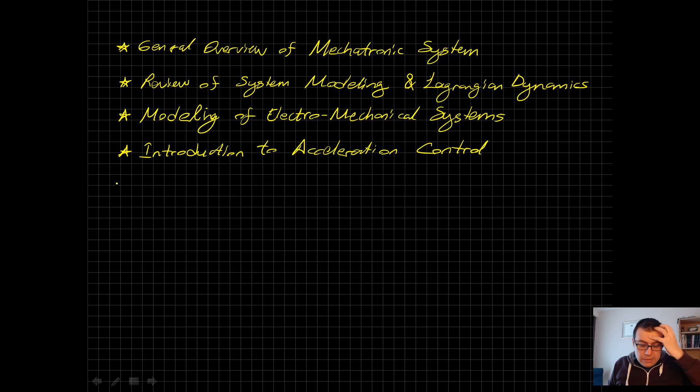So we introduced introduction to acceleration control. And from the acceleration control, we came to the point that if we have certain tools, our systems will be able to trace the desired accelerations, the demanded accelerations from the system.

And there we introduced the disturbance observers. Sorry for those errors. Sometimes my pen is giving some errors. I don't know why. Well, we learned the concept of disturbance rejection, which was one of the main items to be dealt with for robust motion control for high precision systems.

And if you remember, while going over the acceleration control chapter, I was putting there a magical box where I was giving the inverse dynamics of all of the disturbances, assuming that they are known. And here, in this week, in the disturbance observers chapter, we have learned that not all of the disturbances could easily be modeled, but sometimes they had to be estimated, and the disturbance observer concept, actually we were abbreviating it as DOB, was there to estimate or, let me say, measure the disturbance of the system.

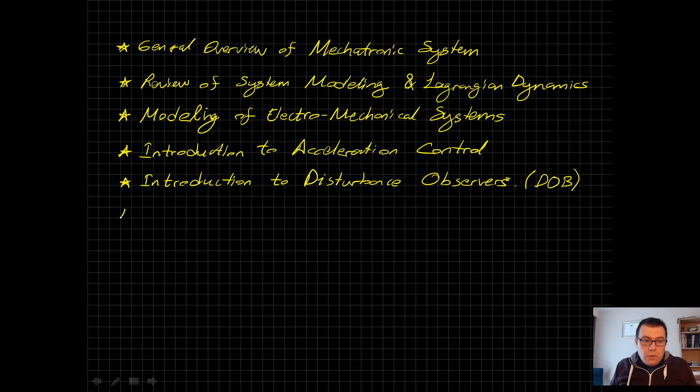So in the following week, we moved to the control of force, and we have introduced, once again, these errors, sorry, introduction to force observers, let me say. Well, I think we can change this notation, and the observer we are talking about is the reaction force observer.

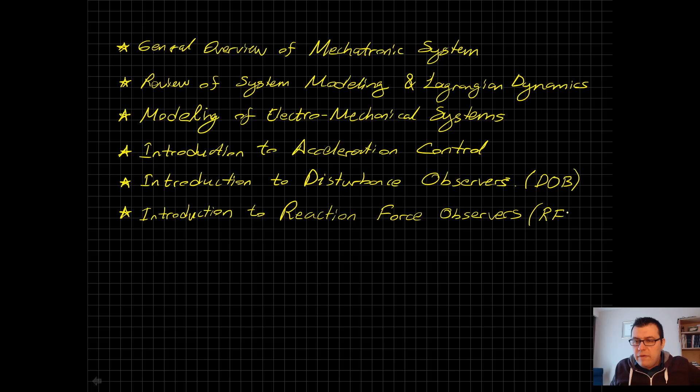Reaction force observers. Well, that was called RFOB. Now, if I segment the course into several episodes, I can easily claim that the first part, this part, is basically a review about the fundamental concepts and why we need motion control. This part is an introduction to the basic tools that we will be making use of throughout our derivations for a variety of motion control applications.

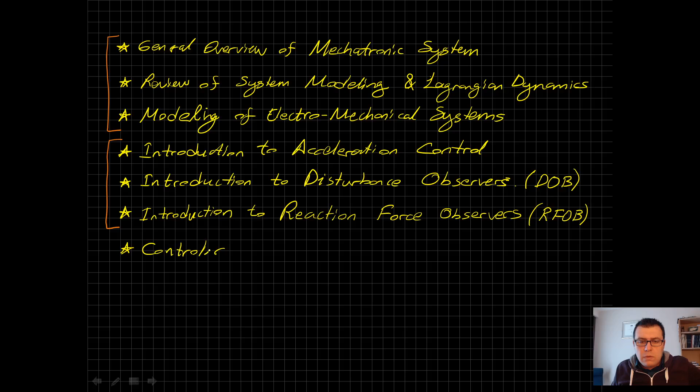And once we have done with the derivations or the formulations of these items, then we started the control action. I'm calling this the controller design for single degree of freedom systems. And if you remember, under this title, we have gone through several different controllers. Let me mark them one by one. We had 4 main controller types for the single degree of freedom systems.

The first one of the controllers that we have covered so far was the velocity controller, right? So velocity controller. We have started with this because this was the easiest to formulate. We just needed the first order differentiation to obtain the desired acceleration for the acceleration control. And from the velocity controller, we moved to position controller, where we have covered the framework which required second order differentiation.

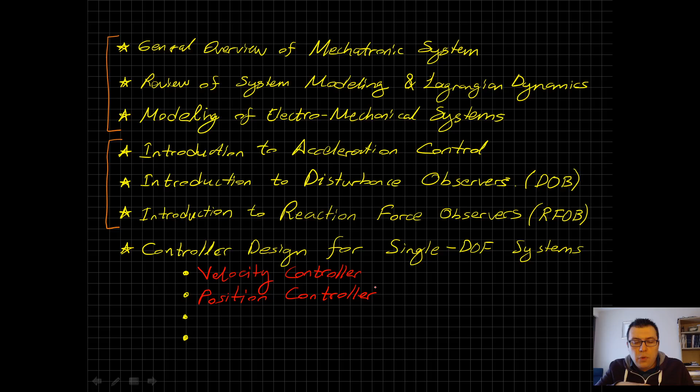The fundamental reason for this was the position signal itself is the zeroth order signal, and in order to reach the acceleration dimension, you need to have 2 times derivative. So you need twice differentiation, and the formulation of errors for velocity control and position control were different from one another. And then we said that sometimes we can combine velocity control and position control together to reach to something that's what we call as generalized error control. Let me also take a note of this. Generalized error control. In generalized error control, we were specifying our error as a linear combination of velocity and position.

And then we were finished with the controller part related to the velocity and position, and we started, actually that's what we have done last week, we moved towards the force controller, and there we have gone through 3 main methods to be covered. The first one is pure spring environment. The second one is spring plus damper environment. And the third one is force control with velocity feedback.

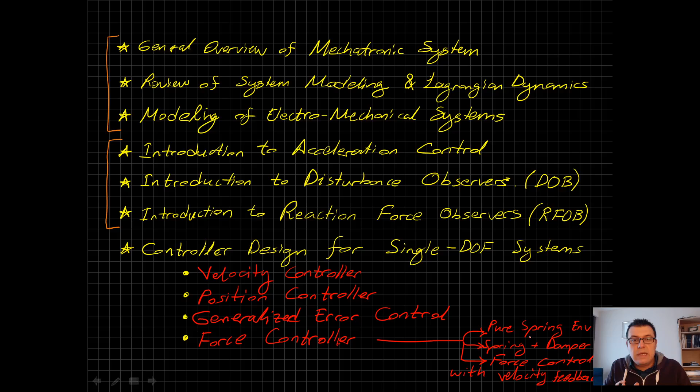So, if you remember that spring damper environment's result was actually a different expression of the force control with velocity feedback, and the difference between those two was that if you have a force controller with velocity feedback, your system first approaches to the target in a velocity controlled manner, so it prevents the impulse over the target. It gently touches the target, and then once the reaction force comes into picture, once reaction force exists, you start to control the reaction force. These were the items that we were discussing in the previous few weeks.

Now let me also take them as another episode of the class. So I can call this the first section, the second section, and the third section. Well, first section is once more about the introduction, about the main concepts. The second section is introducing the tools that will be used throughout the course for all of the derivations. And the third section was dedicated to single degree of freedom control systems design. Well, of course, not all of the systems are single degree of freedom. Let me move to my next slide.

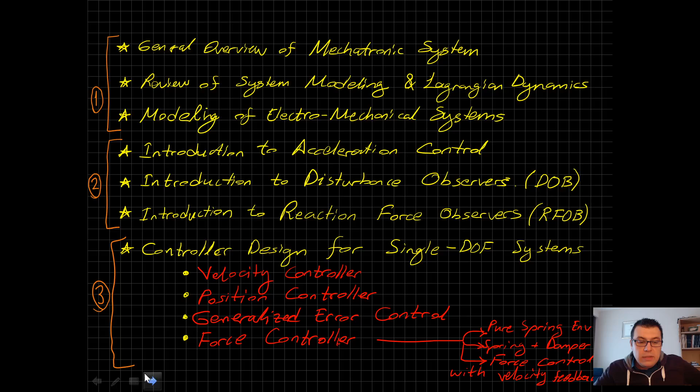Sometimes, actually in most of the applications, we're facing with systems that include multiple single degree of freedom components. We call them multi-degree of freedom systems. So, let me call this new chapter. Well, in the new chapter, we are going to be dealing with systems containing multiple single degree of freedom components. Or in other words, sometimes we refer to this as the multi-DOF systems.

Well, if we have to talk about this multi-DOF systems concept a little bit, I can tell you that it has several distinguishing features that could be treated with care. First, a multi-DOF system is consisted of several single degree of freedom systems, which means that at the joint level, you can control every subsystem with an independent controller, and that's what we will be calling later on in the robotics class the independent joint control scheme.

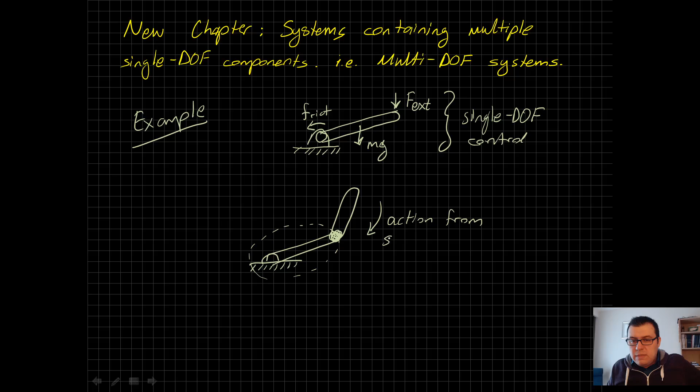Well, if you're trying to control this system, then you have to take into account the dynamics. So action from system 2 on system 1. Well, it's easy to argue that the action from the second system on the first system is nothing but a different type of disturbance, and the disturbance observer in the first system will be able to compensate that. That's true, but in order to create a complete picture for the general control of multi-degree of freedom systems, we have to carry out certain different analysis.

So, if I wrap up my words, if we are interested in controlling multi-degree of freedom systems, our control in the context of motion control systems class will be again in the joint level. So we will be covering the independent joint control structure here, but we will take into account the overall dynamics from the multi-degrees of freedom systems, multi-DOF systems. So this was kind of a summary example about the change between single degree of freedom and multiple degree of freedom systems.

Now let me move to my next slide. And let me change color back to yellow. Well, today's topic will be controller design for systems with functional relationships. So let me write here, controller design for systems. I can actually write here with multiple degrees of freedoms. Oops, that's not DOF. DOB is disturbance observer. DOF is degrees of freedom. So controller design for systems with functional relationships. And we will go through case study 1, which is grasping force control.

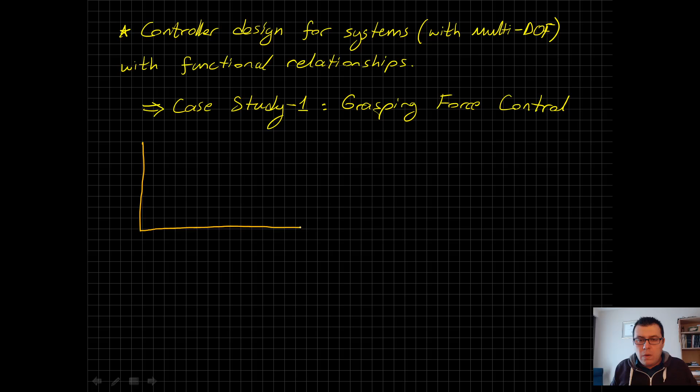Now, in our example, let me change the color for the derivation. In our example, we will go through a well-defined system. Let us assume that we have a system where we have an object to be manipulated by two actuators. Don't forget that the simplest multi-degree of freedom systems start with 2 DOF because, you know, the smallest number bigger than 1 is 2.

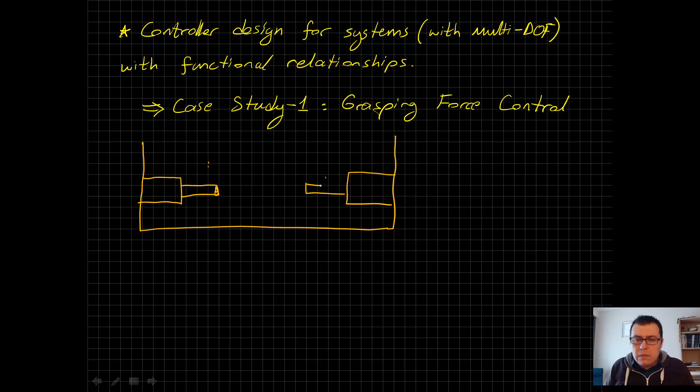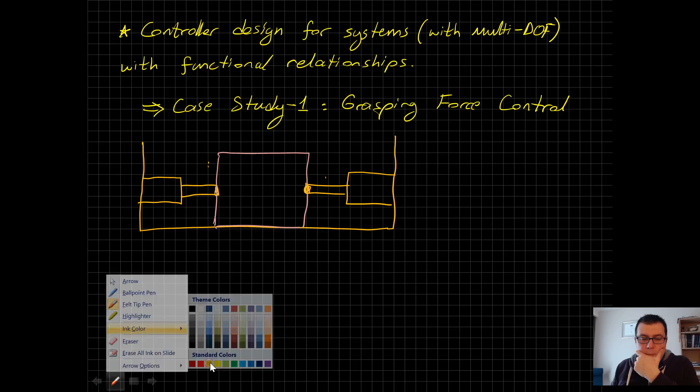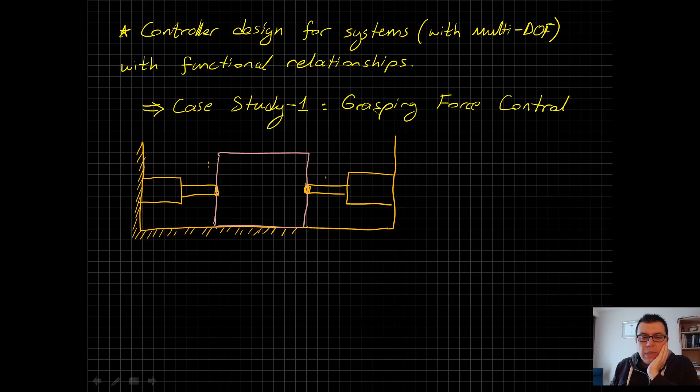Well, here we have an object. Let me try to draw you the object. Well, I think using a different color for the object would be a better idea. So this is our first actuator here. Let me draw a second actuator somewhere here. Well, I think no. I think somewhere here it might be better. So we have two linear actuators, and in between those actuators we have an object. Let me show you the object. This is our object. So we're assuming that an object is positioned between two actuators and is to be manipulated by those two actuators. So we're calling this as grasping control.

Why is it so important? So we have so many tasks where robots are dealing with grasping. So pick and place operations are one of the most common examples of the tasks that the robots have to carry out in the industry, in personalized applications and so on and so forth. Furthermore, if we are talking about collaborative robotics, now the robots nowadays are being used as devices to assist the manpower. If we are talking about collaborative robotics, we will also have grasping control duties in many applications, I can say.

That is simply something like that. You have an object to grasp. So one of the actuators is coming from one side and the other actuator is coming from the other side. So in order to hold the object, you have to preserve certain force on the object. And once you preserve the force, once you track your force control objective, your second objective comes.

You want to move this to somewhere. That's called grasp and move. And now it's time to make the formulation for this. Let me also make my axis definition here with a different color, maybe green.

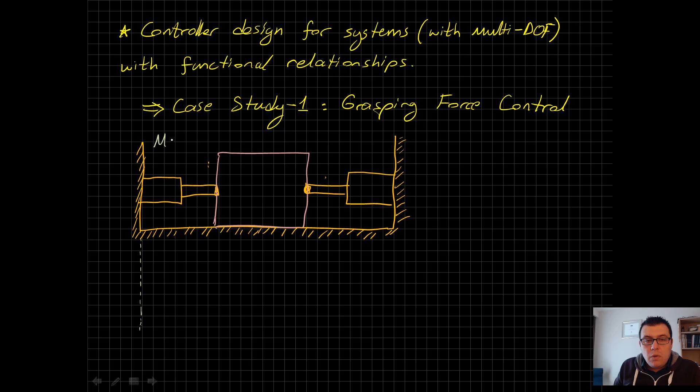So assuming that this is the point from where we make our measures, this system can easily be called the master system. For simplicity, you can call this system the slave system. These are just hypothetical names. You can call these systems system 1, system 2, or whatever. Master slave is just for ease of notation.

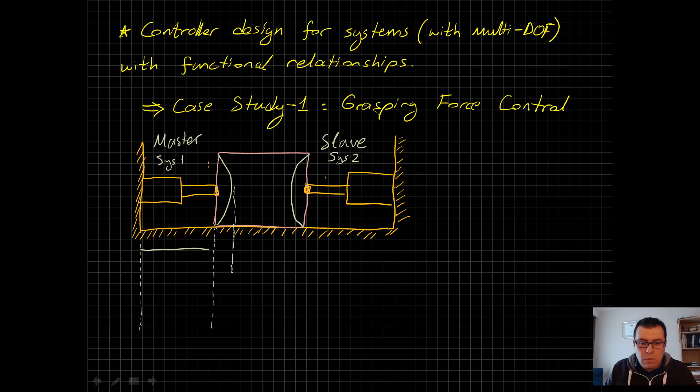If we call the coordinates, we have to define several ones. So this is 1. I'll tell you that there is one here and another one here. So this part will be, and this part will be other 2 points to be denoted. And here is actually our last point. So I will call this xm.

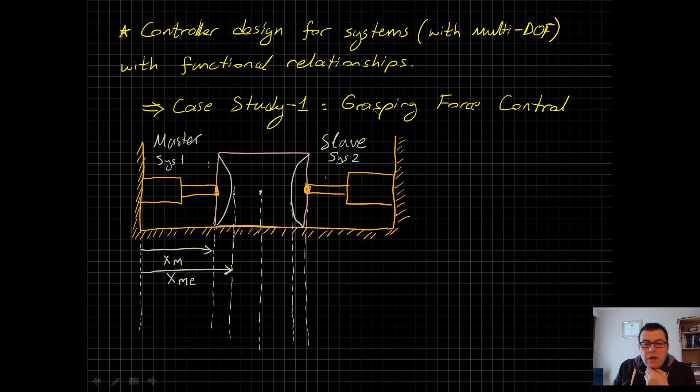So assuming that this is my reference point, this is the distance from the reference point to the contact point of the master system. And I can call the next point xme. This is the environment position. So that's actually, hypothetically, after you push your actuator and squeeze your system. Okay? These are, by the way, exaggerated.

If you don't have a material like a sponge, or in other words, if you have something with high stiffness, these exaggerated differences will not be easily observable. So you'll have micron level deflections in the system. But in order to make the derivation, I have to exaggerate them. Now, let me further define 2 more axes here. That one and that one.

So similar to this one, I'll call this XSE, the environment position of the slave system. I'll simply call this XS. This is the slave system's end effector position. And this one I'll name as X center of gravity.

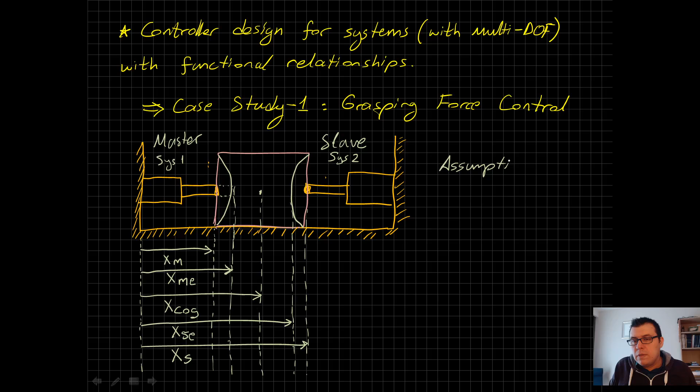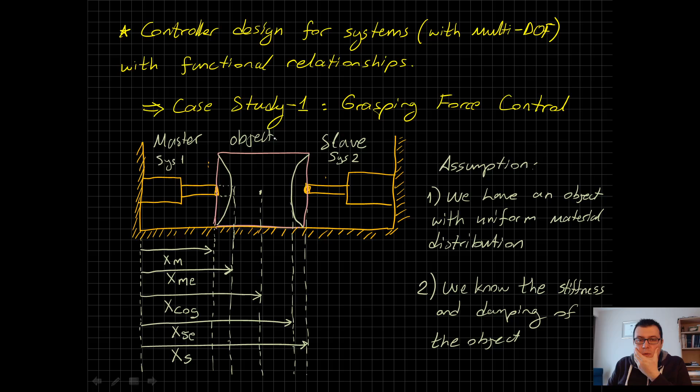So we're assuming that we have an object with uniform material density. Let me call it material distribution in general. And second, we know the stiffness and damping of the object. So this is our object to be grasped. I think so far so good.

So let's move to our next slide and start defining some dimensions. If you go back, in that slide set, the master system is holding on one side, the slave system is holding on the other side. Their collaborative action will create a force on the system to hold it so that it doesn't fall. And while preserving your force reference, you're trying to move this object. So we will try to modify the center of gravity while preserving the grasping force. In order to do this, we have to define the grasping force.

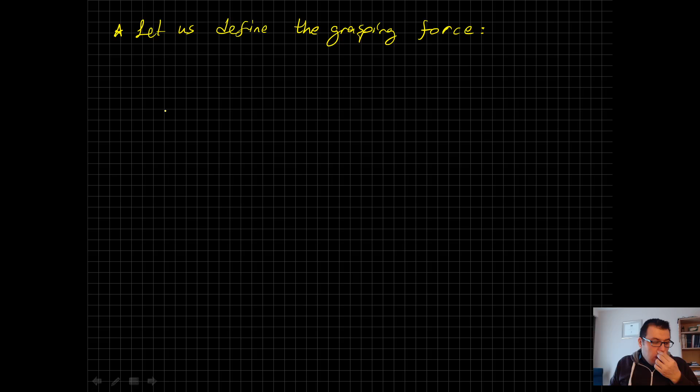Let us define the grasping force in the system. For the grasping force, we may have a look at the figure here, and we can assume an environment with certain stiffness and damping. If we recall from the previous lecture set, the stiffness times the deflection plus the damping times the derivative of the deflection gives us the force generated in the system, and those stiffness and damping are environment related parameters, the portions of the environmental impedance in the system.

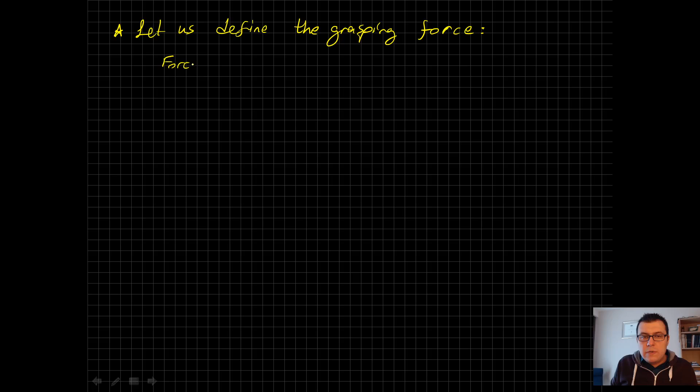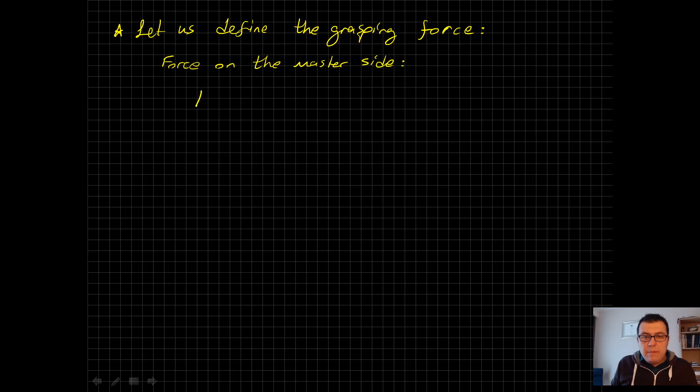So with this notion in mind, we can define the force on the master side as follows. Fm is equal to the stiffness constant, the spring constant, times xm minus xme, plus, I'm sorry, that's not the master system, that's the environment. We have one object, and it has specific Ke and De. So the force on the master side is equal to Ke times the master side deflection plus De times the derivative of the master side deflection, Xm minus Xme, dot.

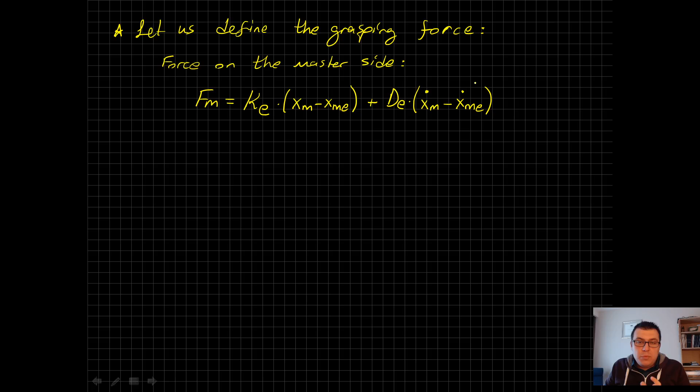You may ask me, last week we were ignoring this component. Xme dot was assumed to be 0. That was because our environment was assumed to be stationary. But now the environment will also be moving. Recall that our objective is to grasp this object and move it in the right-left direction. So this can be a good model for the force generated on the master side. Let me write in a similar manner the force generated on the slave side. Force on the slave side.

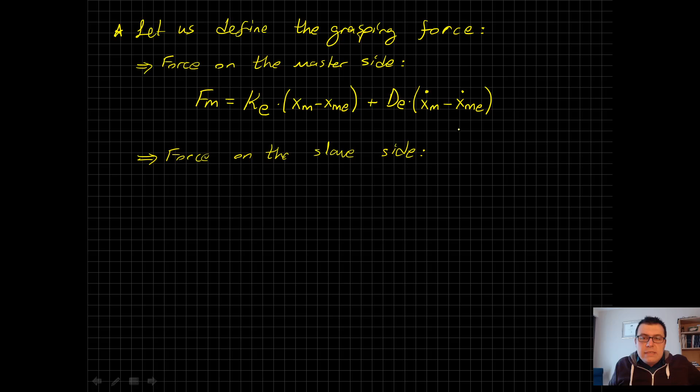It's nothing different. It's actually very similar. F slave is equal to, now we have a change of sign, minus Ke times x slave minus x slave environment, I'm sorry, this is again minus De times x slave dot minus x slave environment dot.

Well, the minus sign is obvious for most of you, but I have to express this once more. It's basically due to change of direction. If you look at the first expression, it's Ke times Xm minus Xme plus De times Xm dot minus Xme dot. So it's nothing but stiffness times the deflection plus damping times the deflection's derivative. That's the force on the master side.

In a similar manner, stiffness times the deflection and the damping times the deflection's derivative should be the force on the slave side. But look at this. Slave side force will be towards right, right? That's why we have a minus sign here. It's because of the change of direction. Okay? So, having defined this, can we formulate a term for grasp force? Can we formulate the grasping force?

Let us formulate the grasping force. The grasping force can simply be given as F grasp is equal to summation of the master side force plus slave side force. So this is a fundamental term that we shouldn't forget.

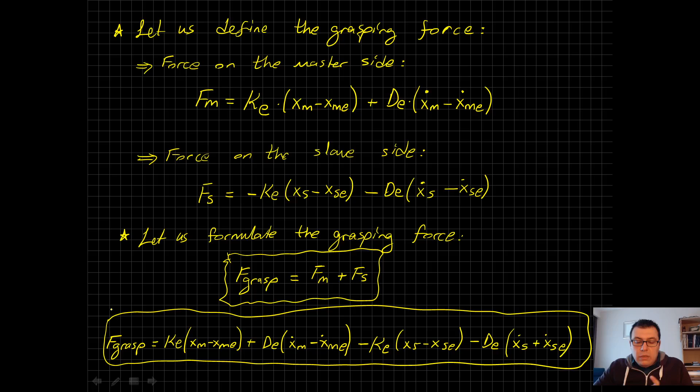So remember, these were all defined in the previous slide. This is the grasping force we have in hand. Let me also mark this equation for you, because we will make use of those definitions for our controller derivation. Let's move to next slide. So, can we simplify that? We will actually. So, let's write here. Make a trick.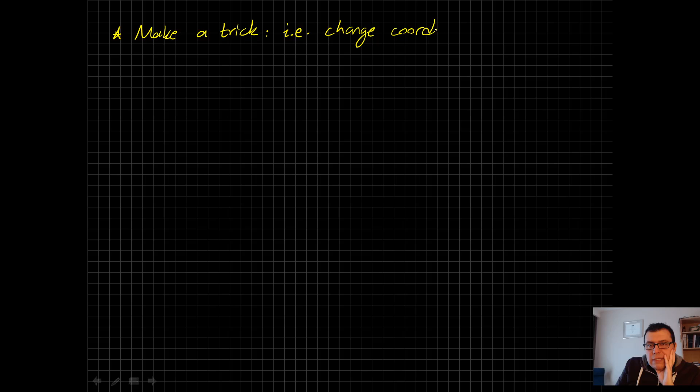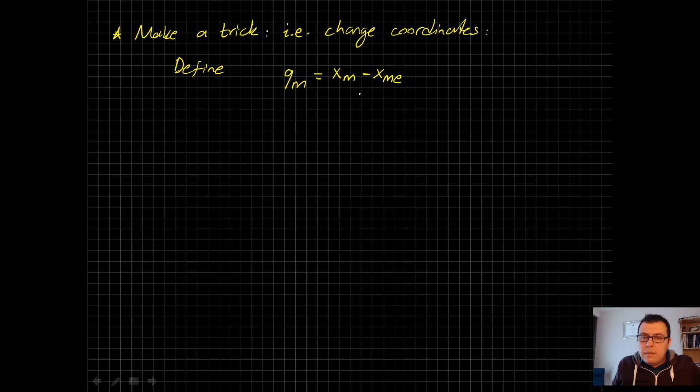We will change the coordinates. Change coordinates. How can we do this? We can actually define the following. Let's write define Qm to be xm minus xme and Qs to be xs minus xse.

Okay, so these two new definitions will simplify our life when we're looking back at this grasping force equation. It's nothing but calling the deflection in a new dimension. Here Qm is simply the deflection here, and Qs is the deflection on the slave side, right? Qm, Qs, and of course their derivatives. Qm dot is the rate of change of deflection. Qs dot is the rate of change of deflection on the right hand side.

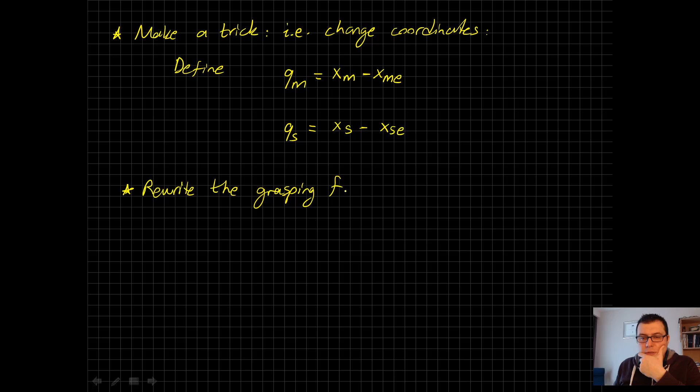So, with these definitions, we can rewrite the grasping force as follows. F grasp, the grasping force is nothing but when you substitute these two back to here, you're gonna get, I'm sorry, Ke times Qm. Let's write here.

Ke times Qm minus Qs, I will say, because remember Qs was this. So if you go back to that equation, Ke times Qm minus Ke times Qs is here, right? So Ke times Qm minus Qs plus De, the environment damping, times Qm dot minus Qs dot. This is the new definition for our grasping force.

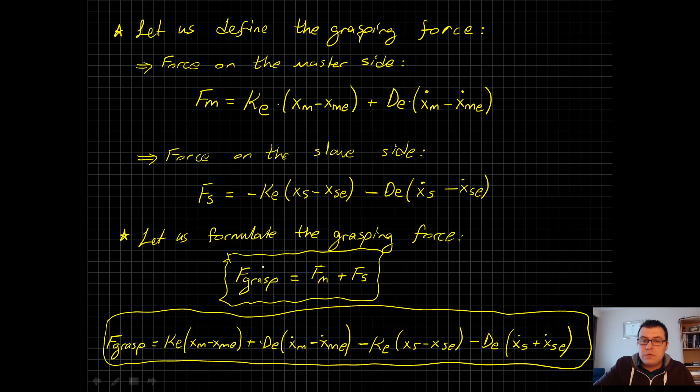Well, I think so far so good. What we have done basically was to define the grasping force in a system like that one. Here, we should keep in mind that the object's center of gravity may change its position. We haven't yet defined this, by the way. Well, once we have the grasping force definition, can we write the grasping force error? Obviously we can.

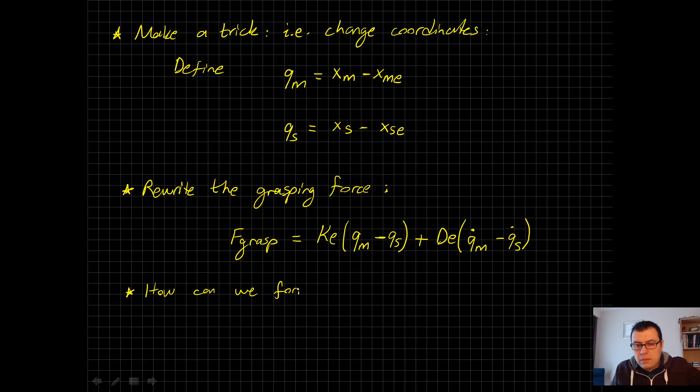How can we formulate the grasping force error? That's our question. It's not so difficult. We will make an assumption here. Assumption. We will assume that our grasping force reference, so F grasp ref, exists and is differentiable, continuous and differentiable.

What this means is that f grasp ref already exists and it's continuous. We can take a derivative of that and we can reach to f grasp ref dot, right? So keeping this in mind, let us formulate the grasping error. I'm sure that most of you would immediately jump and tell that it's nothing but reference minus response, right?

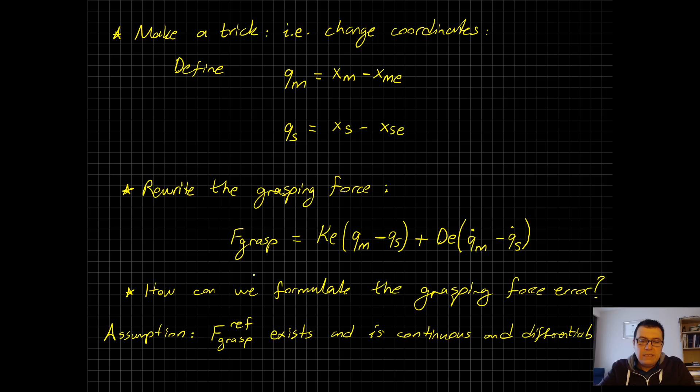Here, in order to show the derivation in the other way around, I'll just make a change of sign and define our grasping error as E grasp is equal to F grasp minus F grasp reference. So what we were doing until now was simply reference minus response, but now I changed to response minus reference. Does it make any difference? It only makes difference in the transients actually.

You know, if you define it to be reference minus response, your error will start from some value and go to 0. Let's assume that you have a positive error, it will start from positive value and go to 0. And if you change the sign, you'll have the same error from negative side, but if you formulated your controller again in an exponentially decaying manner, your error will converge to 0 value in the negative side of the transient, but eventually you'll have 0 grasping error with the method we were applying so far.

Actually, we can write the content of f grasp and we can define it in a better way. So E grasp, the grasping control error, is Ke times Qm minus Qs plus De times Qm dot minus Qs dot. So this part until now was the grasping force minus the grasping force reference, F grasp ref. I will highlight this for you because this one will be important when we're making our derivation in the coupled system.

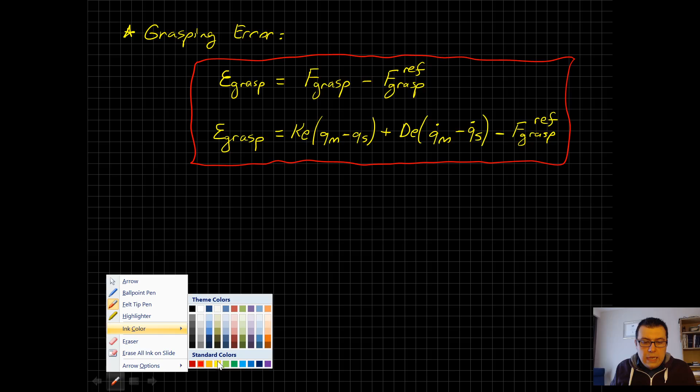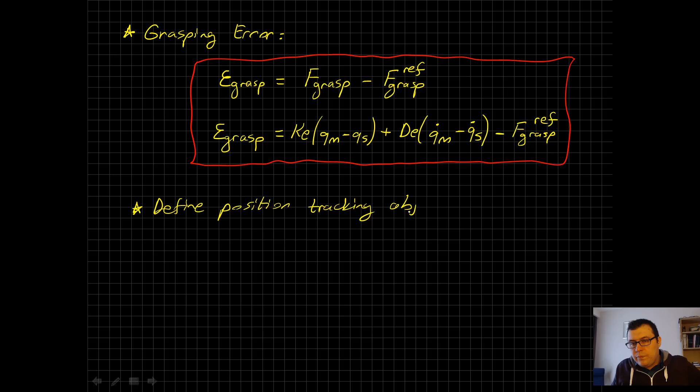And let me write here the error in the center of gravity. So we will make a new definition that is center of gravity. Let me try to express this in a better way. Define position tracking objective. What's the position tracking objective? It is simply following the reference, the center of gravity. I call it a COG reference for the object under consideration.

In order to accomplish this task, we have to first define the center of gravity. So define COG. I'll write you simply here. QCOG, center of gravity position, is nothing but QM plus QS over 2. Right? So if you go back to the figure, if you deflect this side by 3 centimeters and deflect this side only by 1 centimeter, it's easy to claim for a homogeneous object that 3 from here, 1 from here, 3 minus 1, it's 2 centimeters, and the division by 2 yields 1. So your center basically moves only 1 centimeter to this side. Okay?

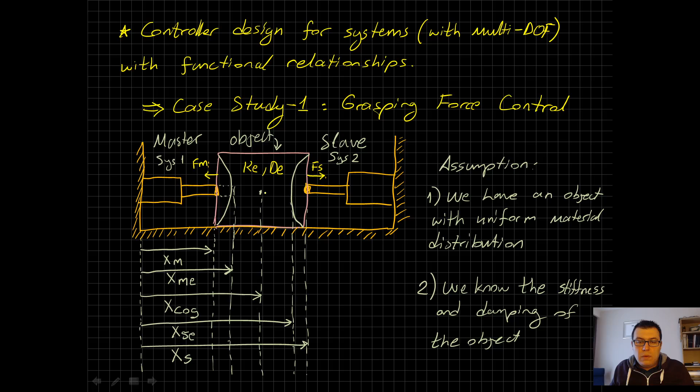So if we expand the content of QCOG here, our center of gravity error can simply be written as QM plus, I'm sorry, is it plus? Yes. QS over 2 minus QCOG reference. Let's highlight this, just like the part we had in the force. Okay, so far so good.